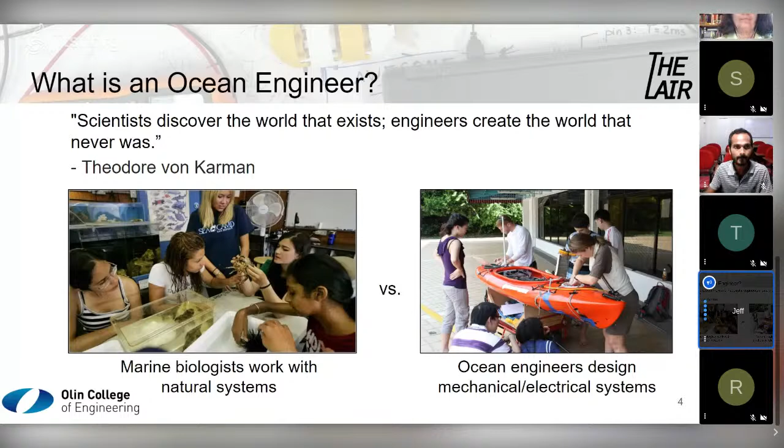One of the really cool things about ocean engineering is that it's an inherently interdisciplinary field of study. I think about it as combining many engineering disciplines, drawing on content from mechanical engineering, electrical engineering, computer science, material science, and bringing them together into the context of the marine environment, which is extremely challenging.

It has unique features such as enhanced corrosion due to being wet and high levels of salt when you're in the ocean. The marine environment is dark and it's challenging, and there's a lot of pressure. So you think about adapting all these skills from other engineering disciplines and placing them in this context of the ocean.

When we think about specific content areas of my formal training and what I try to impart on my students, there's a high level of engineering math and physics. Personally, I'm an experimental hydrodynamicist, so thinking about fluid flows and how structures interact with water, waves, and currents. There's electrical prototyping in circuitry and computer programming—I think in modern engineering study it's almost impossible not to have some level of programming.

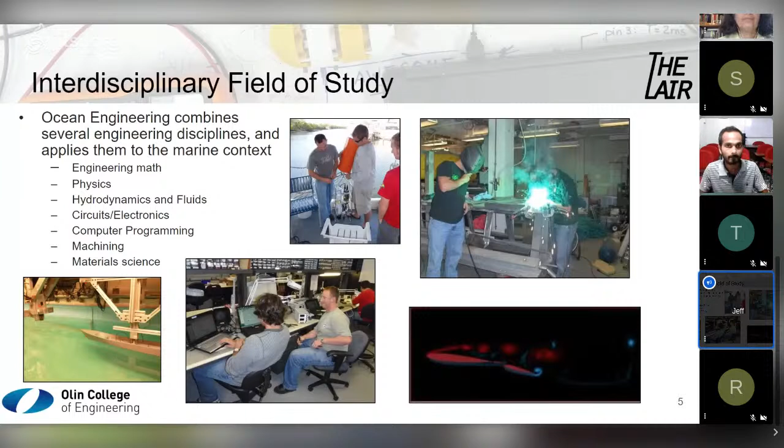Machining—we still build stuff that we're going to place in the ocean, which is fun—and some material science. I'll talk a little about my PhD research, which was building sensors. I ended up doing a lot of work with soft materials and doped polymers in order to create various sensors.

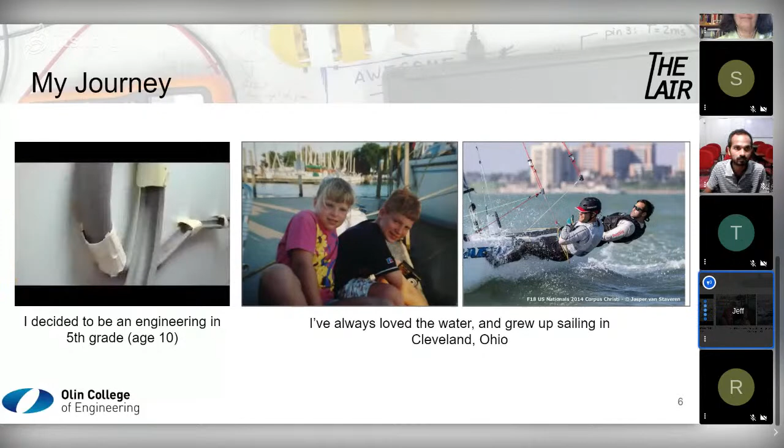For a long time I wanted to design roller coasters, and it turns out only very few people get to do that. But I've also always loved the water. I grew up in Cleveland, Ohio, right on the shores of Lake Erie, and grew up sailing and playing with boats. The picture on the right is from just a few years ago, racing with one of my friends in grad school.

From a very early age I knew I wanted to work around the water, on the water, and with boats. So when I started searching for what I wanted to major in in college, this thing called ocean engineering popped up, and it was like, yep, that's what it's going to be. When I was first entering college, I decided I wanted to be an ocean engineer with the goal of designing sailboats for the America's Cup—if you haven't heard of it, that's the pinnacle of competitive sailing, a worldwide event. The next one will take place in New Zealand in a couple of years.

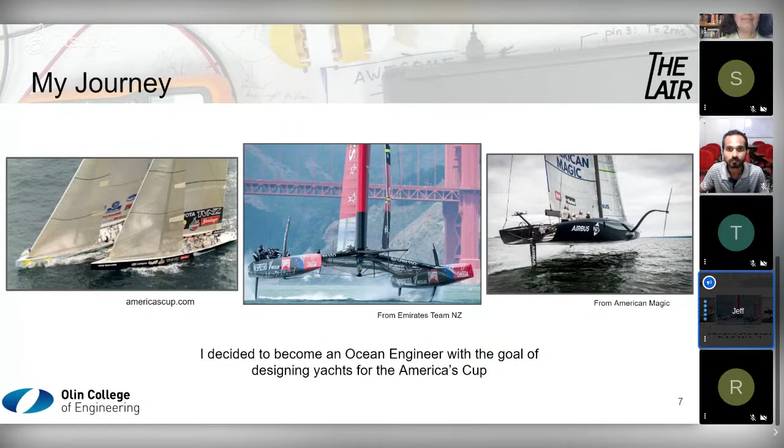After finishing my undergraduate degree, I felt like I had learned a lot and was enjoying what I was doing, but I felt like I could learn more. So I decided to continue on to graduate school, where I worked on a PhD in ocean and mechanical engineering from MIT, the Massachusetts Institute of Technology, in Boston. I moved up to Boston and worked in the MIT towing tank.

From there, I decided I really wanted to continue on this academic quest, so I took a postdoc at Harvard University, just outside of Boston, in the self-organizing systems research group, with a wonderful advisor named Radhika Nagpal. In that group, we worked on swarming - this idea of a bunch of small robots working together. I was really focusing on underwater swarming, and I'll talk about that as one of the project examples later in this presentation.

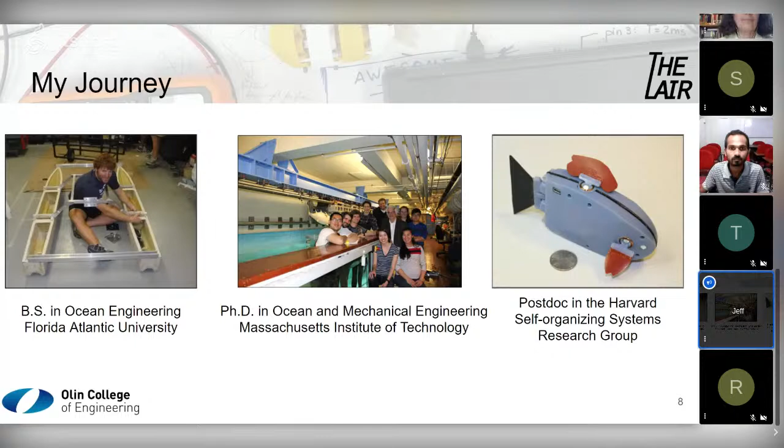So where I am now - I am at the Olin College of Engineering, and at Olin I have a lab called the Lair, because everyone wants to have a lair. I mean, why not? When you're growing up, you want to have your evil lair. Well, hopefully it's not very evil. But I have the Laboratory for Adaptation, Inclusion, and Robotics, which is a great acronym, if I do say so myself.

The name for this laboratory was very intentional. We do a lot of work in assistive and adaptive technology, so the adaptation comes from there. It also speaks to our mindset of working with new technologies and adapting them to other purposes. The word inclusion comes from having lots of different types of students working on projects, especially in assistive technology, that bring people into science and technology, create devices that help with tasks of daily living, and really work on that inclusion piece. Then robotics - our tool for a lot of our efforts are tools from robotics.

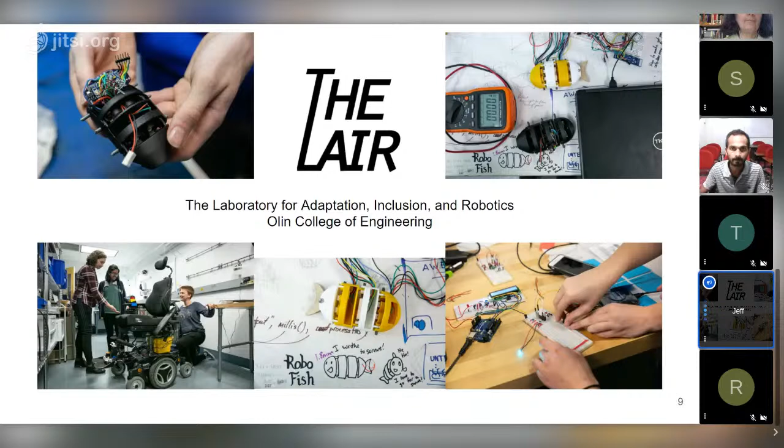We build small fish robots, we prototype electronics, we work with power wheelchairs. So robotics really ends up being the tool, the mechanism, and the vehicle to achieve our goals of adaptation and inclusion. Olin College is undergraduate only, so all of my research students are undergraduates, and the laboratory focuses on two primary themes: we work on assistive and adaptive technology.

An example of that is, on the far left, a smart power wheelchair that we worked on a couple summers ago - thinking about adding sensors and instrumentation to a power wheelchair, not to replace a human driver, but to enhance their performance, providing variable levels of help so that an individual with a progressing disease can keep performing at a high level for their daily living.

We're also working on storage for power wheelchairs. Right now I have students this summer working on rehabilitative devices for children with cerebral palsy, which is a lot of fun.

Our second theme is marine robotics and sensing, and that's where I'll spend the majority of the rest of this presentation, really talking about the ocean engineering and marine robotics part. On the right-hand side, a picture of some of the very small miniature fish robots that we build in the lab. The miniature robots are great because if you're working with undergraduate students, it's a great way to move them into the marine field in a very approachable and affordable way.

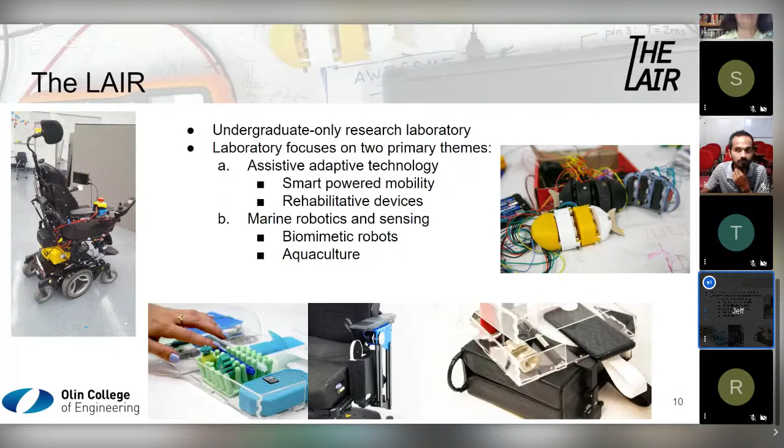So what I'm planning to do over the next 30 minutes or so is talk about 3 different projects that I've worked on in the field of ocean engineering to try to demonstrate the range of the research and the range of the various projects that fall within the umbrella of this field. Ocean engineering is inherently interdisciplinary, and hopefully as we talk through some of these projects, it'll demonstrate that there's really a lot going on.

Those 3 projects are going to be bio-inspired sensor design, which was the work that I did at MIT during my PhD. Some bio-inspired swarming, which was the work during my postdoc at Harvard and then continued a little bit at Olin. And then a new direction of research that we're just starting on in my lab at Olin, working on aquaculture and sensing systems for aquaculture. We'll talk about how our oceans are really in peril right now, and that sustainable aquaculture is probably going to be necessary for us to continue feeding the world and not killing off everything.

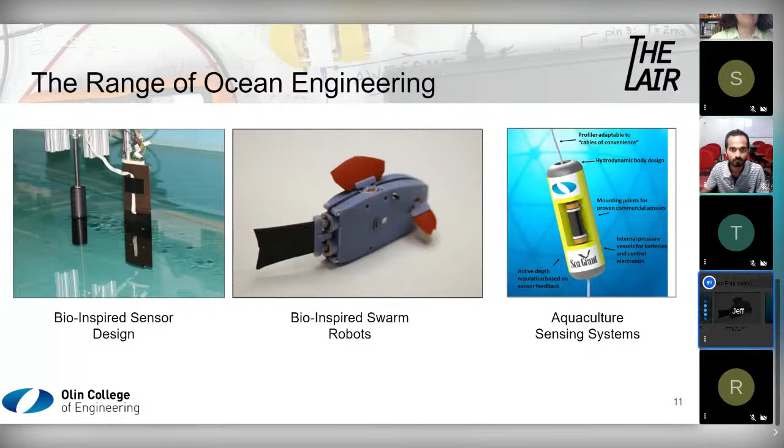So I mentioned that we were going to do bio-inspired sensors. One of the areas that I've spent a lot of time on is this idea of biomimicry, which is using inspirations from nature and applying them to engineering systems and human problems.

Influences from nature can be seen in all sorts of engineering applications. A couple of photos I have here are the design of a bullet train, I think in Japan, that is modeled off of the aerodynamic shape of different types of birds. On the right is this very small car that was modeled off of the shape of a boxfish, which is surprisingly aerohydrodynamic despite this boxy shape. It moves really well. But there's a lot of other examples of this as well.

You may have heard about various coatings that are based off of shark skin, that are low drag or resist biofouling or various things. Optical flow sensors are based on the eyes of hummingbirds or bees. And then you may have seen videos of various running robots, like the Robo Cheetah at MIT or the Spot robot from Boston Dynamics. Another example is adhesives based on the fingers of geckos, that can climb up interesting surfaces in variable terrain and stuff like that. So bio-inspiration and biomimicry, we see it a lot in engineering, and it's really drawing on the years and years of evolution that we see in nature and using those lessons for our own systems.

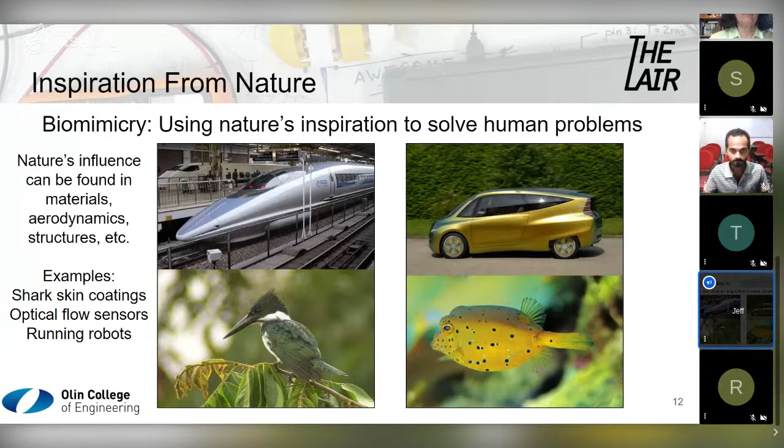The first project I want to talk about is my PhD work, which was on developing lateral-line inspired sensors. When you think about working in the ocean, there's really a few problems that you run into when you start thinking about marine robots.

One, you can't really see in a lot of cases. If we look at the picture on the left here, this is an example of turbidity. Water often has a lot of particles suspended in it, whether dirt or sand or things like that, and it makes it very challenging to navigate using visual systems like cameras. It's also very dark in the ocean, so as soon as you get below a certain depth, light really doesn't make it down there. Using visual systems like cameras becomes very challenging without high-powered lights, which draw a lot of energy from your systems. On the surface, you have waves, which make it hard to see.

You really can't hear all that well underwater, so a lot of underwater sensing is based on acoustics, using sound. It works generally pretty well, but there's trouble with noise sources from biological and man-made things. One problem when I was working in Singapore is there's snapping shrimp off the coast that make it really loud, so it's hard to use some acoustic mechanisms.

Also, when you're in shallow water, the right-hand photo shows this idea of multipathing. If you're trying to communicate or make a map using acoustic means, your sound waves bounce off the seafloor and sea surface, and it becomes really challenging, especially in shallow water, to understand those signals. It's also just really difficult to communicate.

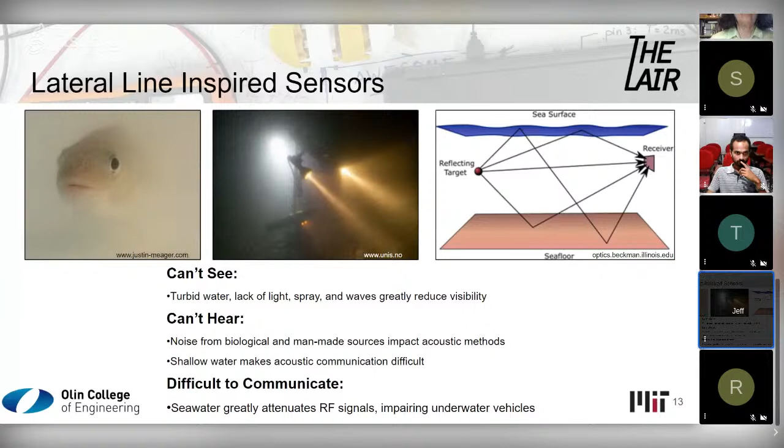Now, looking to nature, we see fish have this really cool sensory system on the side of their body that they use to accomplish a lot of these things. In the video on the left, this is a fish called the blind Mexican cavefish. These little fish live in caves in Mexico, and those caves are completely dark, so over the years their eyes have completely atrophied away. They don't have a visual system for navigation, but you can see this little dude cruising around through this Lego maze very rapidly, and if you were to zoom in, he actually doesn't hit these Legos. So the question is, if this fish doesn't have eyes, how is it navigating through this maze?

It turns out fish have a sensory system called the lateral line on the side of their body. In the upper right image, that lateral line is outlined in red dots. Looking at the lower panel, the lateral line is a set of little nerve endings embedded either on the surface of the skin or underneath it that measure flow speed. For the neuromasts beneath the skin, if there's a pressure difference along the side of the fish—which can happen due to interactions with flow structures, obstacles, or a bug vibrating somewhere in the water—you get induced flow through these canals, which tickle the nerve endings, and the fish can feel that. These nerve endings get deflected by the induced flow, send signals up to the brain, and the fish are able to navigate and carry out their behaviors based on essentially seeing the flow structures around them without eyes.

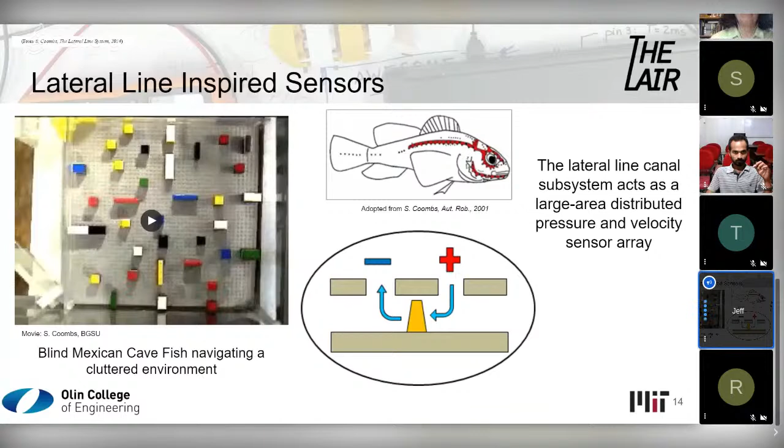As an engineer, we look at this and think, operating in a marine environment is super challenging—we have trouble seeing, with turbidity and darkness. Maybe we can draw a lesson from this lateral line system that fish have and apply it to our underwater vehicles. On the left-hand side, we can think about a few behaviors fish do that we might be interested in replicating on an underwater robot. The first is this blind Mexican cavefish—it doesn't have eyes, and it can detect obstacles. For an underwater vehicle, being able to detect obstacles so we don't run into things is really important, especially in non-ideal conditions like darkness or turbidity. So there's an idea: object detection, taking that from nature and moving it to unmanned vehicles.

I'll talk more about cooperative behaviors later, but fish do this incredible thing where they form into huge schools—in that middle image, that's called a bait ball. That's hundreds or thousands of fish all swimming together in a cooperative, coordinated way, which can help them stay safe from predators or save energy while swimming. That's something we might want to do with robots as well—utilizing multiple robots to do cooperative behaviors, in a low cost and simple way, relying on sensory systems.

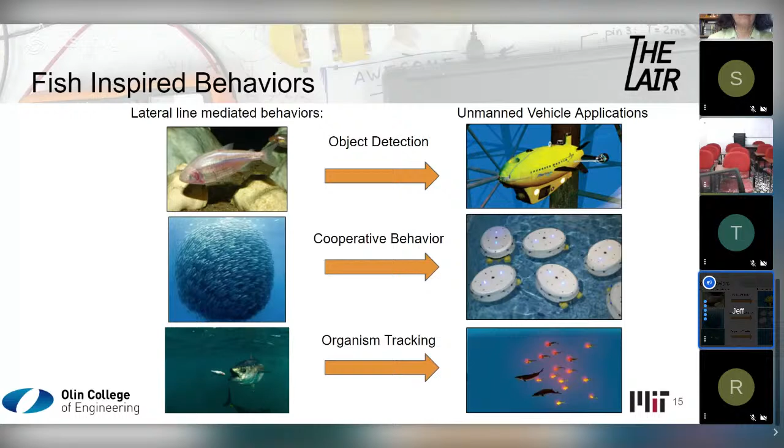So basically the work that I did over the course of my PhD was trying to change the paradigm for underwater sensors, from what you see on the left, which are large, expensive, stainless steel, rigid pressure sensors, to what you see on the right, which are soft and flexible waterproof sensors based on a material called polydimethylsiloxane, which we typically refer to as silicone.

Silicone is really common, very inexpensive, waterproof, flexible, and easy to manufacture. It turns out that if you take silicone and embed conductive particles within it, you can create a material that is what we call piezoresistive. All that means is that the electrical resistance of the material changes as you press on it.

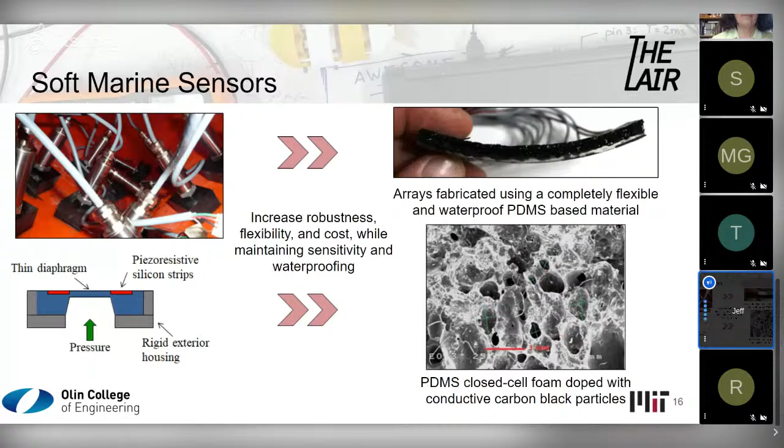If we look at the left-hand side here, this is just a little cartoon of what's happening inside this material. You basically have this bulk matrix, this PDMS silicone foam, which is the light gray, and embedded inside of that are all these little particles of a material we call carbon black, which is a petroleum byproduct and is conductive. When you push down on this material, more of these conductive particles come in contact with each other, and so the resistance of the material goes down.

So right there we have a sensor. If I'm measuring the voltage through my sensor, as I push on it, the resistance changes, and my voltage is going to change. We can measure pressure, we can measure force. So that's really cool.

What I show on the right are the sensors that I ended up building. These were arrays, not single sensors, but 4x1 arrays that were quite small, about 80 by 20 millimeters, and more importantly, very thin. In this case I made multiple different thicknesses, but this particular one is 7.8 millimeters. So very thin sensors that can be glued onto the side of marine vehicles, foils, or submarines, in order to have that sensory mechanism similar to what fish have.

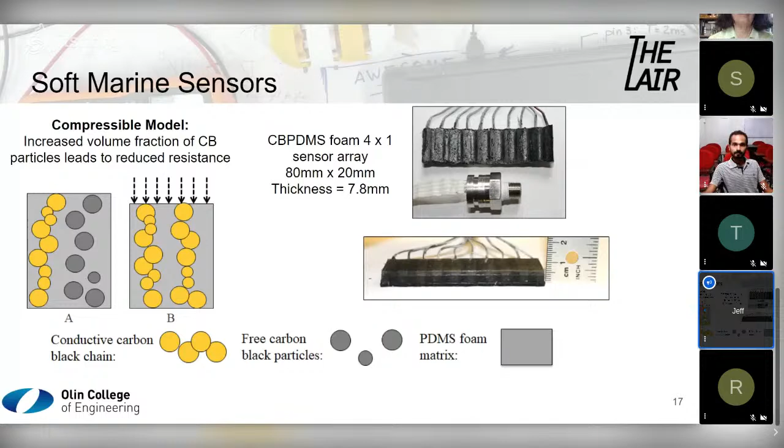So the question is, how do you test this? Well, you test it like a fish would. On the left-hand side, this is a fish in a water flume. The video should be playing now. The water is flowing from bottom to top here.

And the fish is in what we call the wake of this D-shaped cylinder. Fish tend to hide behind obstacles because they can save their swimming energy by essentially utilizing the flow created by these obstacles, which we call a von Karman vortex street. It's a very ubiquitous flow in fluids, and we noticed that fish really take advantage of this.

So we decided we were going to test the sensors in a similar way. On the right-hand side is a foil being towed through the towing tank at MIT, and my sensors are glued onto the side of the foil, kind of right below the water line. We basically towed this sensor through the flow created by this upstream cylinder, and we were able to detect the presence of these flow structures, just like a fish would. For us, that showed, okay, cool, the sensors work, and potentially we could use them to inform motions by underwater vehicles and different things like that.

Didn't get quite that far during my PhD. I wanted to graduate at some point. But it was a really promising first step to say, hey, we can actually start sensing the fluids like a fish does.

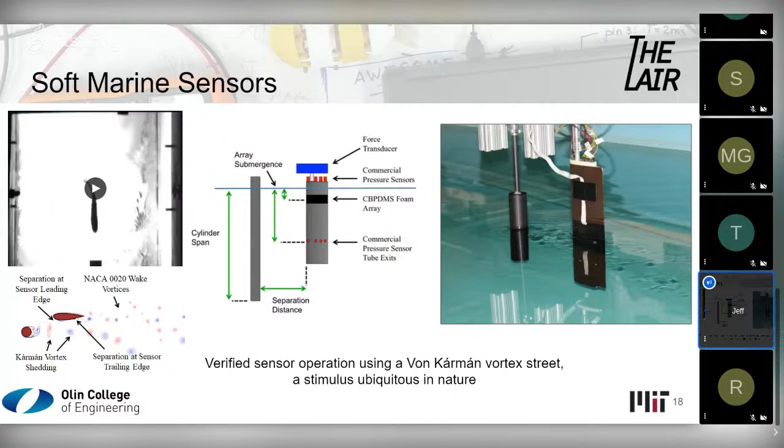All right, so that was the work on bio-inspired soft sensors. We're going to stick to this theme of bio-inspiration but change course a little bit and talk about collective behaviors and swarming. When I started my work at the Self-Organizing Systems Research Lab at Harvard, we really wanted to focus on this idea of collective or cooperative behaviors. The principle behind cooperative behaviors is that a group collective can often achieve things that a single individual cannot.

Especially with a lot of things going on in the world today, this is actually a really important message, even beyond engineering systems.

If you look at the two pictures on the left side of the slide, these ants want to go from the ground up to this leaf. Individually, they can't do that—they're too small. But when a group of ants works together, they can form bridges out of their own bodies and move across a gap that's way too large for any one of them.

The interesting thing with ants is that they really don't have a leader telling each individual ant where to go to create this bridge. Instead, each ant follows a set of very simple rules, and these behaviors actually emerge out of that simple set of rules.

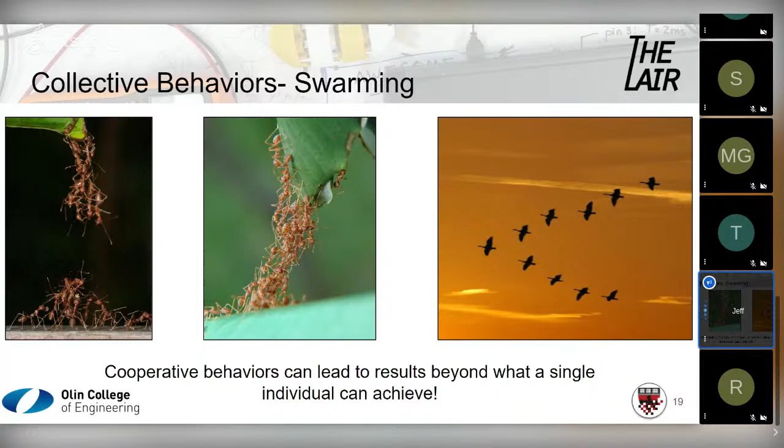On the right, this is geese flying in a V formation, working together to reduce the amount of energy needed to fly over very long distances. We see these collective or cooperative behaviors in many different parts of nature, and we'd like to do some of them with our robotic systems.

At Harvard, we were working on various different types of cooperative behaviors. I've included a couple examples here—these aren't necessarily projects I worked on, but things from the lab. At the top is a set of robots called TERMES, inspired by termites and how they build these really large and intricate termite mounds.

I don't know if this video will play—it seems to be getting hung up. But basically the idea is that these TERMES robots work together to build structures. It's multiple robots, no one controlling them, but they move around and can build structures with multiple robots working together.

So the idea here is that in the future we could have teams of robots building structures rapidly without human intervention. This could be really useful in all sorts of parts of the world, or for disaster relief—there are lots of opportunities where collective building of structures could be really valuable.

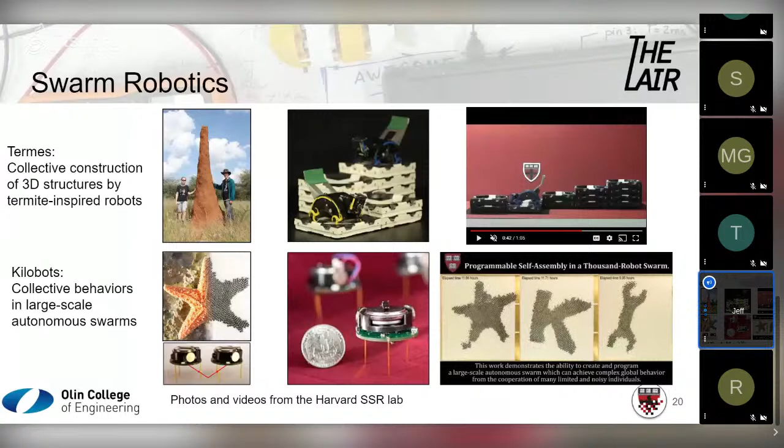Right now you might be asking, hey Jeff, you're an ocean engineer, you built sensors for your PhD—what are you doing at a swarm robotics lab? That's a great question. When I joined the lab at Harvard, what we really wanted to work on was doing swarming underwater.

Basically thinking about schools of fish—in nature, fish schools are a biological behavior that has some really nice benefits for the fish.

If this video on the left will work—it doesn't appear to want to—but if it was working, it would show basically a shark attacking this little fish in the middle, which is sad for that fish. But in nature, fish schooling is often used as a predator avoidance mechanism. When you have a bunch of fish swimming in coordinated swarms, it makes it much harder for a predator to attack any single individual, so it's a survival mechanism for these fish.

It also leads to energy savings. When you have a bunch of fish swimming together, each individual fish is actually using less energy in order to swim.

So an example of that would be if you watch cycling, there's the idea of the peloton. A bunch of cyclists riding together, and each individual cyclist within that peloton is actually using less energy because there's less aerodynamic drag, since they're riding essentially in the wake of the cyclists in front of them.

And so when we start thinking about underwater robots, doing similar collective behaviors could be really beneficial for energy savings. If we want to move across a long distance with our underwater robots, moving in a school so that you don't use as much energy would be really great.

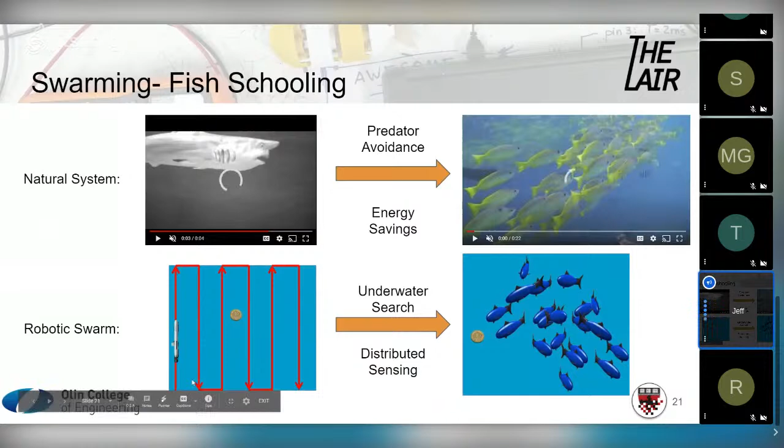On the left-hand side, this is the typical search pattern used with an underwater robot. We refer to it as mowing the lawn, moving in a very set geometric way. If instead we could have a swarm of underwater vehicles all doing their own independent searches in a much more unstructured way, you could potentially cover a much greater area faster, which could be really important for a search and rescue mission, or finding a leaking oil well. There's any number of examples you could talk about.

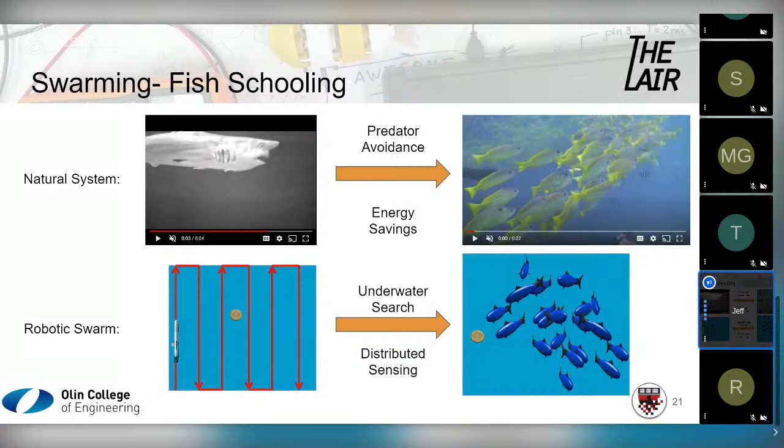So when I was at Harvard, we worked on building this little underwater robot that we would use for swarming. It's shown here - a very inexpensive robot, about 10 centimeters long, so you have a US penny next to it for scale. But it's a very capable robot - it can maneuver with 6 degrees of freedom in full three-dimensional space.

It has an LED and photodiode, so it can move towards light sources. It has a pressure sensor in order to regulate its depth. And the propulsion is provided by flapping fins.

And it's interesting, we didn't actually set out to build an underwater robot that looked like a fish - that wasn't the goal. But it turns out that using a flapping fin like a fish does to maneuver underwater is actually really efficient, which kind of makes sense because fish have evolved over millions of years.

So the propulsion mechanism, if you look above the pectoral fin, is what we call a magnet-in-coil actuator. We have a coil of wire, and inside of that coil is a magnet on a hinge. As you change the direction of the current through the coil, it creates a magnetic field, which causes these fins to flap back and forth. Those actuators are about 10 cents a piece when you order the coils in bulk, so it creates a really inexpensive way to make a completely waterproof underwater actuator.

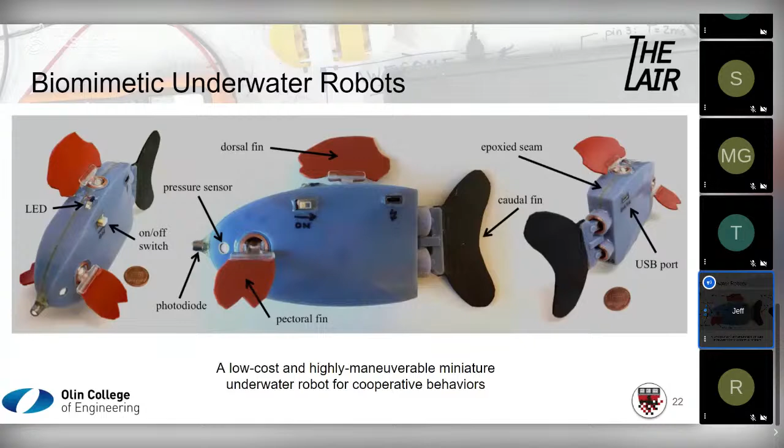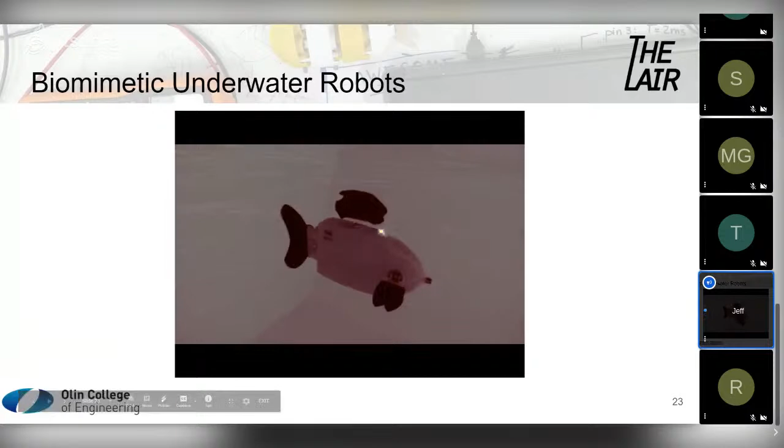Hopefully this video works. So this just shows our little robot swimming around. It's not extremely fast, but it's kind of cute in my opinion - a little swimming robot.

At real speed, it swims at about 1 body length per second, but it's a very small body length, so it's not particularly fast. We can swim in a straight line, in circles, in squares, hover at a particular depth using our pressure sensor to decide what depth we're at, and use feedback control to regulate depth. We can dive up and down between depths, which can be really important if you're trying to survey the full volume of an underwater area.

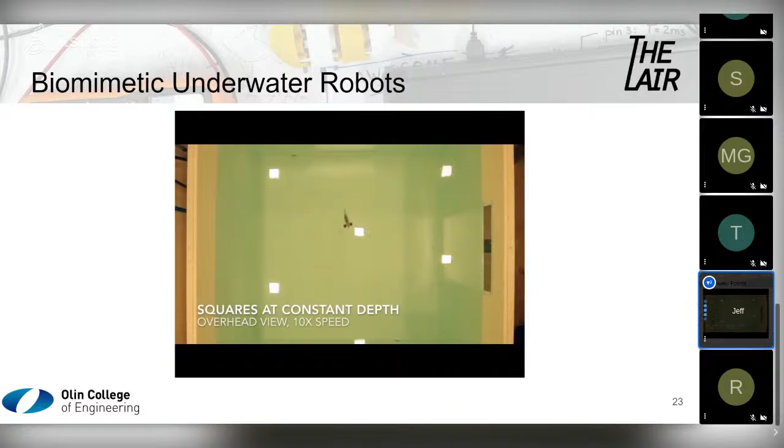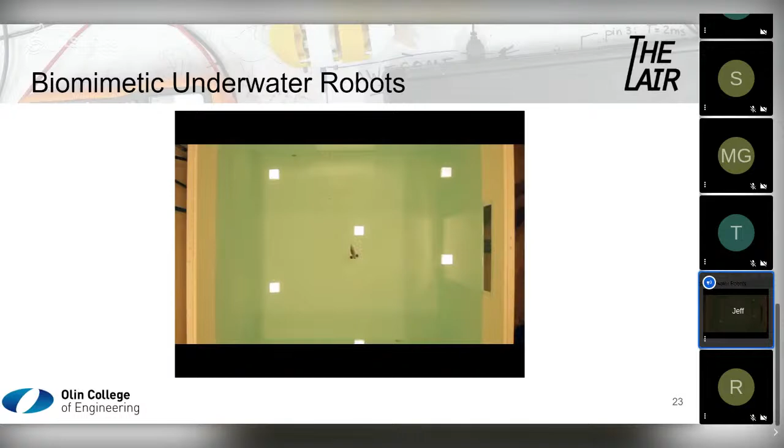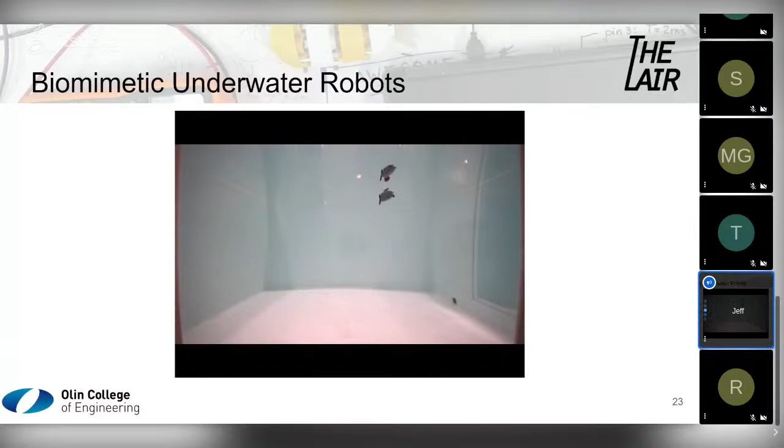We have an IMU inside the robot that keeps track of its position and how much it's turning, so we can have it swim particular patterns. We can also swim squares at different depths - swim a square at a certain depth, rise up a little bit. It's a positively buoyant robot, so it rises up a little more, swims another square. This is an example of how you could basically take measurements over a full volume of water if you were doing something like environmental monitoring.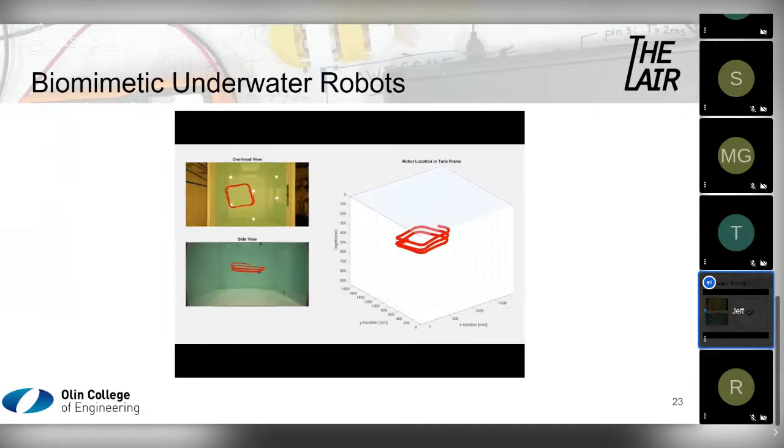And one of the things I worked on a lot when I was part of this project was doing visual tracking of the robot in 3 dimensions. Whenever you do experiments, you need to have some way of assessing the experiment, so we worked on being able to track the robot in 3 dimensions.

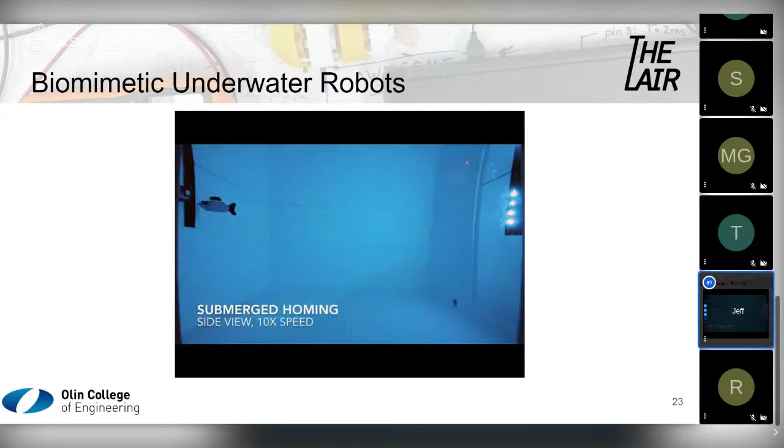In this part of the video, we're showing how the fish can basically swim back and forth between light sources. It has a photodiode on the front of the fish, and as we turn lights on and off, it'll swim towards the light.

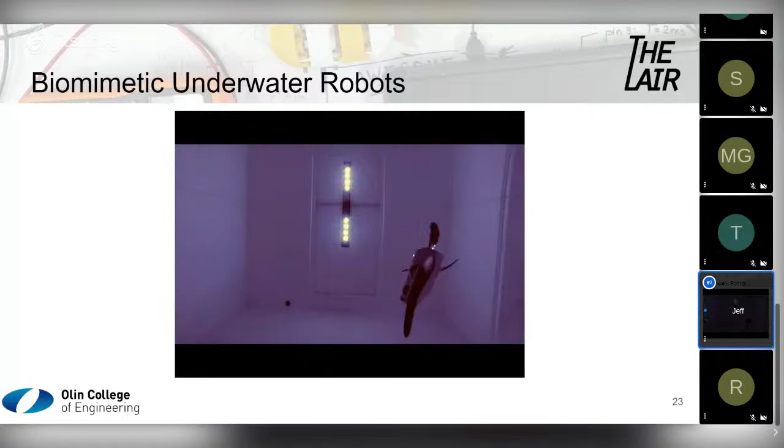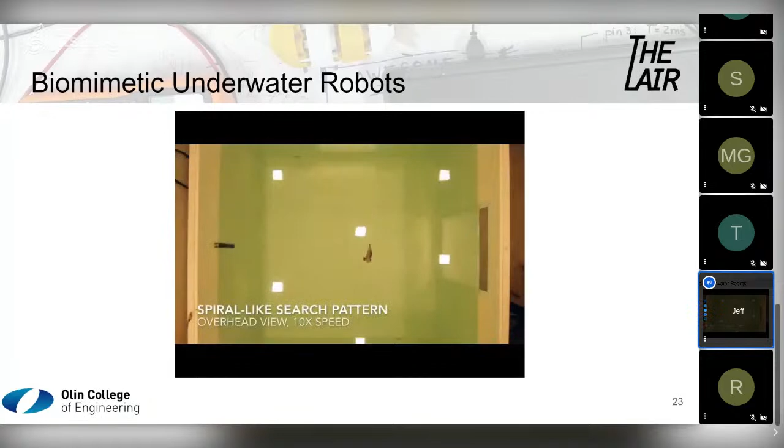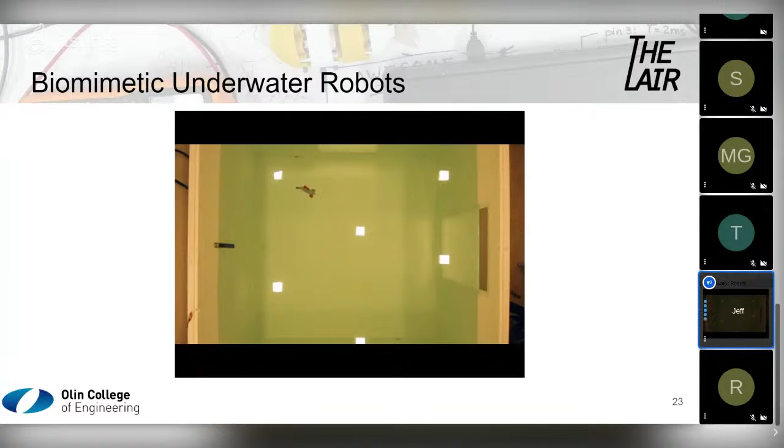And so this could be a way of getting a bunch of robots to come together as a group, one of the behaviors in collective robotics. One way you could imagine doing that is by having a really bright light that all the fish then swim towards. And again, spirals, squares, and search patterns just demonstrate that a very, very small 10-centimeter robot actually has quite a bit of capability.

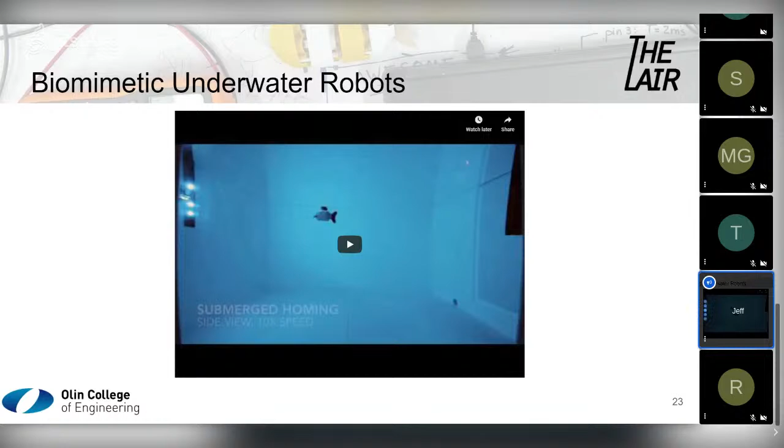That was all work done over at Harvard during my postdoc. But when I came to Olin College, we brought this idea of very small, inexpensive underwater robots with us. Instead, we wanted to work on this idea of undulatory swimming, again bringing this idea of bioinspiration back.

I find fish swimming to be extremely beautiful. When I went to the Monterey Bay Aquarium a few years ago, I was at the deep ocean tank, and I remember just watching the tuna swim, absolutely fascinated by how efficient and beautiful they are as they swim.

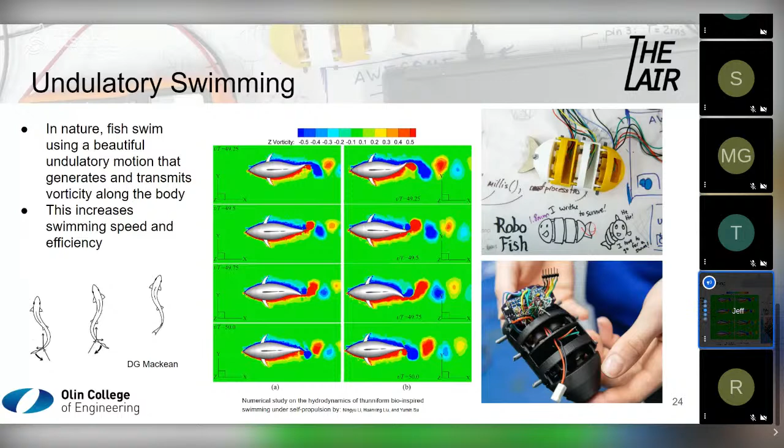They're 3D printed, so these fish use very low cost and very simple hardware — 3D printed bodies. We use Arduino Pro Minis, which are inexpensive microcontrollers. These robots are powered using a magnet-in-coil, or what we call a MIC actuator — very low cost and waterproof. On the upper right here, you'll see kind of a final version of these simple robots.

In this case, they're not autonomous, they're tethered, but it's a way for us to start investigating this idea of multi-jointed swimming.

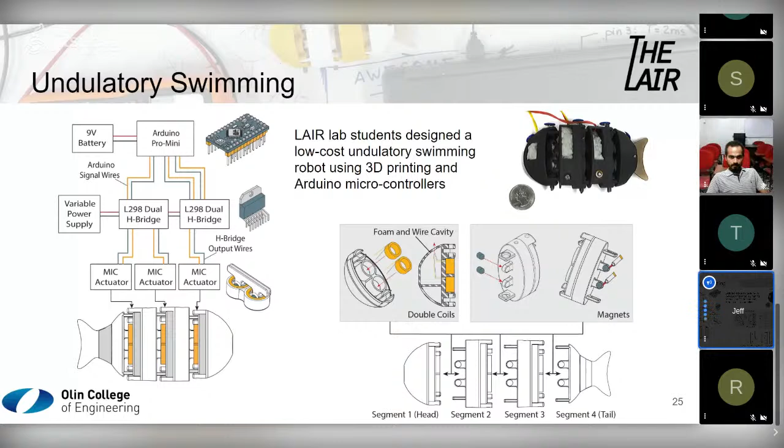Just a couple images of what that looks like. My student Katya did some great work doing experiments in a small water tank, using overhead cameras with these little blue markers to track this undulatory swimming motion, and then looking at joint angles.

This was all open loop swimming, so we didn't have a feedback controller in the fish, but we did find we got some pretty nice swimming performance with this undulatory motion. We also found we have a long way to go to get anywhere close to the efficiency of actual fish — we were able to achieve about a little over a body length per second, but fish can do much, much faster than that.

So undulatory swimming is excellent, and there's been a lot of work in it, but mostly at large scale with very expensive robots. So we'll continue plugging away at this for a little while longer.

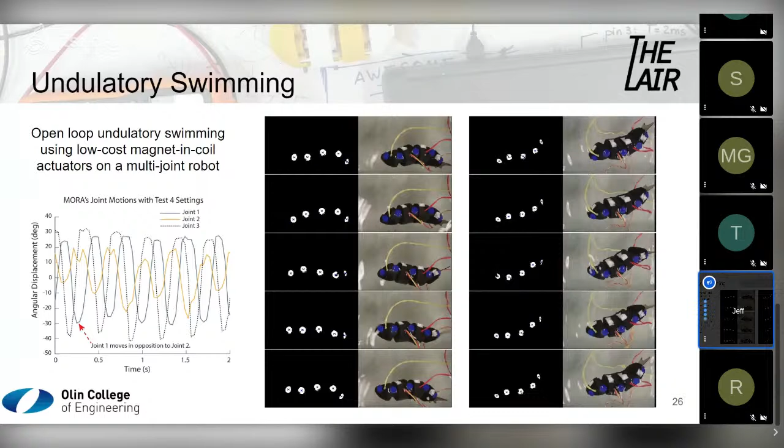We're getting towards the end here, but I wanted to follow up with one last thing, which is to talk a little bit about aquaculture.

Many of you have probably seen the UN Sustainable Development Goals. Goal 14 talks about life below water. One of the goals outlined there, 14.A — not sure why they went with A instead of a number — is really about developing research capacity and marine technology, and thinking about how marine technology can improve ocean health and enhance marine biodiversity, especially in developing countries.

At Olin College, we really are trying to train engineers that are going to make a difference in the world, and the UN Sustainability Goals are something that really resonate with us. So I'm thinking about trying to move my lab in the direction of focusing on sustainable marine technologies.

A couple of stats here that I pulled out of some of these UN reports: over 3 billion people depend on marine and coastal biodiversity for their livelihood, either directly through fishing or indirectly through other related industries.

33% of our marine fish stocks in 2015 are being harvested at unsustainable levels, and 60% are basically at their max sustainable level. So we're in a bit of a crisis when it comes to fishing in the world right now. We're essentially exploiting our oceans and pulling out way too much fish, and as global populations continue to rise, it's going to be a problem.

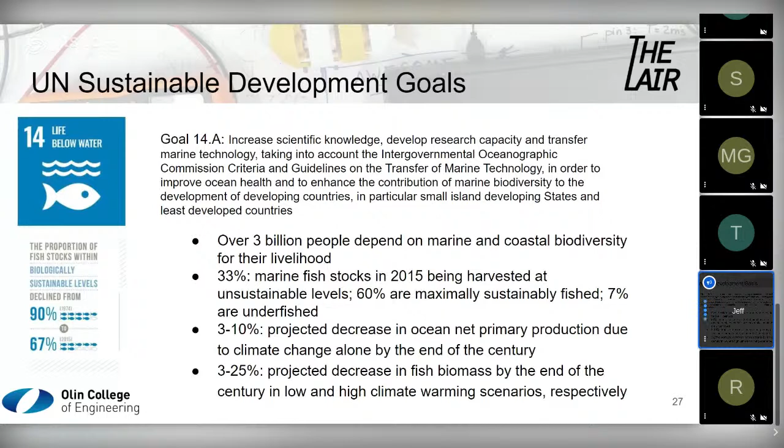Because of climate change, not only are we pulling more fish out of the ocean, but the ocean is actually getting less productive. As global ocean temperatures rise and acidification increases, we're not only grabbing more fish, but there's just less fish there to grab. And so this is an existential threat to both the world and to people.

So the question is, global populations are increasing, we're also eating more seafood than we ever have in the past, and our productivity of the oceans is decreasing. How do we basically deal with those conflicting problems?

I think one of the solutions is aquaculture. So we need to start doing intentional farming of fish and other seafood stocks in order to continue satisfying the needs of a growing world population.

The figure on the left shows that aquaculture is increasing year on year, where the production of capture fish is either leveling off or decreasing because of that decrease in productivity of the ocean. The plot on the right, the interesting one is the red line, which shows the consumption by humans of seafood, fish in particular, over time. So not only are there more people, but more people are eating more seafood.

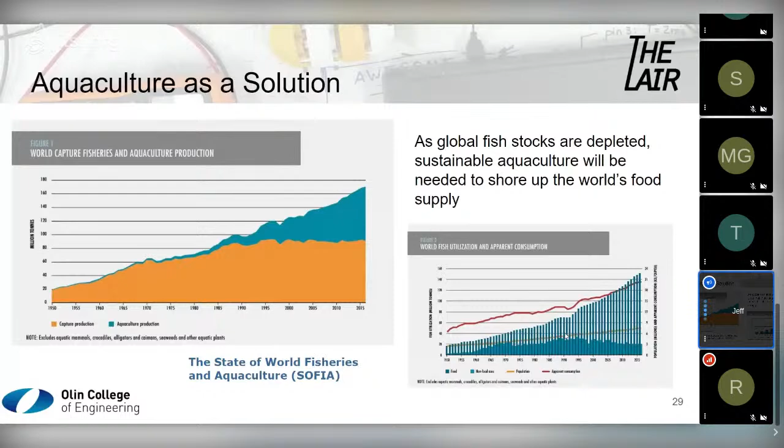When we talk about aquaculture, a lot of people think about fish farming onshore, in ponds. Right now, freshwater pond-based aquaculture makes up the largest proportion of what's happening worldwide.

But the future of aquaculture, in my opinion, really lies in offshore practices. So moving fish farming further away from shore into deep and nutrient-rich waters, where strong currents bring in natural nutrients to the fish and keep them healthier, while also dispersing the byproducts and reducing the environmental impact of having these fish farms. On the left is a fully submerged fish cage off the coast of Hawaii.

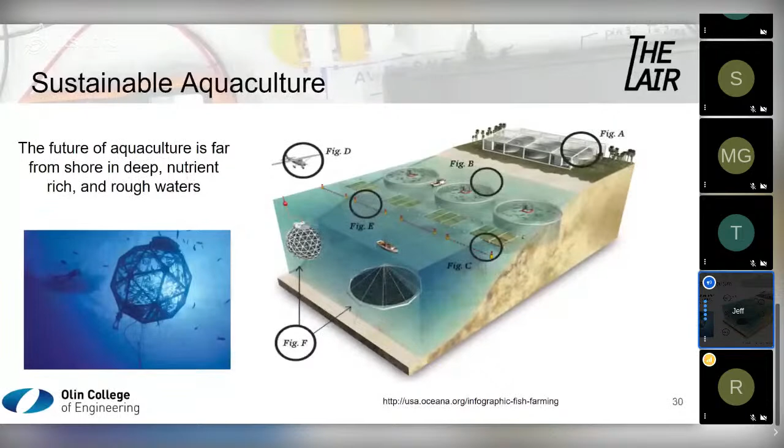On the right is a plot showing these various types of farms. It's really going to be a holistic ecosystem: raising young fish on shore, growing kelp and shellfish near shore, and then thinking about doing these fully submerged cages far away from shore in order to take advantage of the existing productivity further away from our coasts.

When we think about fish farming, it's a really hard challenge, especially as you move offshore. So there's a lot of engineering opportunities here. If we think about building large-scale offshore fish farms, we need robust structures. The ocean's a really hard place to work. There's waves and currents that destroy things.

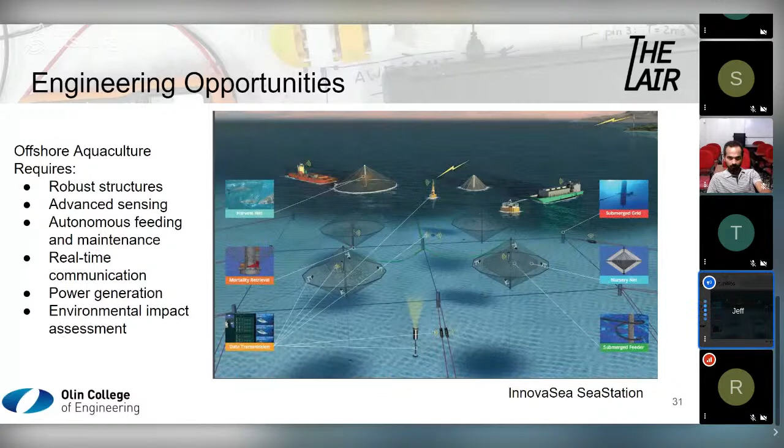We need advanced sensing about the health of our fish. We need to feed and maintain the fish stocks autonomously. We need to be able to communicate in real time to understand when we need to harvest. We also really need to understand the environmental impact of our actions. And so there's been just a few studies so far looking at the environmental impact of offshore aquaculture.

The good news so far is that it's found to be quite safe if you have these cages off in strong currents and away from shore. This was a study done by the University of Miami, studying a fish farm off the coast, about 8 miles off the coast of Panama. They found that if they sampled upstream of the cages and downstream of the cages, the nutrient levels were actually very similar. So these offshore submerged cages have a lot of promise for a future where we're producing large amounts of high quality protein to feed the world while also not impacting the environment.

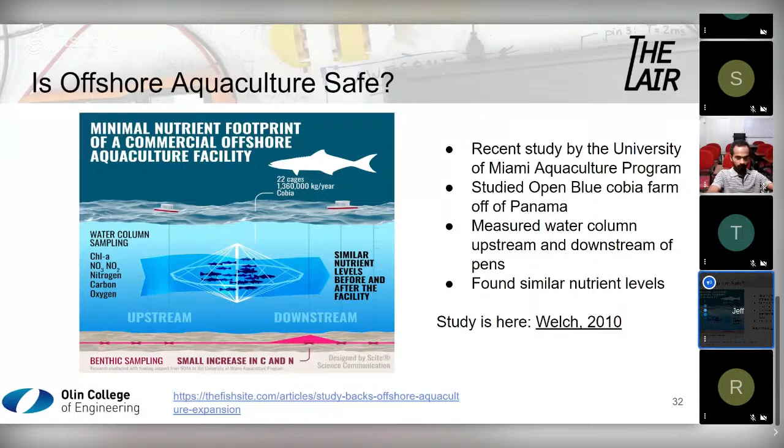But we can't just take this for granted. We actually need to build underwater robots and sensors to make sure that our fish are healthy and that we're not impacting the broader environment. In my lab, we now have funding from an MIT Sea Grant to work on sensing solutions for offshore aquaculture.

So I have 4 students working this summer on building devices that you can attach onto cables that already exist within fish farms, in order to measure fish health and environmental impact. I feel like that's the next phase of my journey through ocean engineering: addressing the question of sustainable aquaculture to tackle some of the challenges we face in the world.

I want to give a couple of acknowledgements: the MIT Towing Tank and my PhD advisor, Professor Michael Triantafyllou, an amazing researcher; the Self-Organizing Systems Research Lab at Harvard and Professor Radhika Nagpal, a fantastic human being and mentor; and my students in the LAIR Lab at Olin College, an incredible group of young people I enjoy working and going to brunch with.

With that, I'll open it up for questions. I think I'm going to stop screen sharing. Now you can all see me — that's me sailing off Hampton Beach, New Hampshire a few summers ago. But we can always bring back other slides if needed.